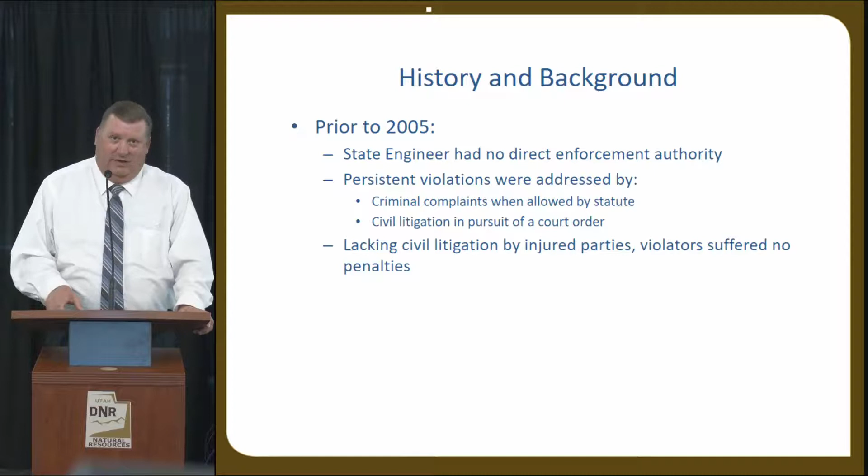In 2005, the statute was enacted, giving the state engineer enforcement powers, and again those powers are administrative in nature. What I do have authority to do is levy a fine. Also in 2005, administrative rules R655-14 were established, which outlines the administrative procedures for enforcement proceedings before the state engineer.

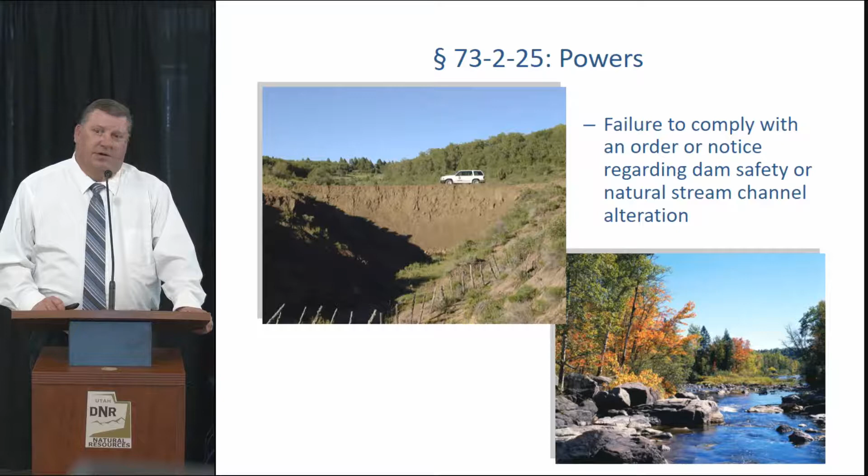Okay, what authority do I have? I can initiate an enforcement action if somebody is taking water without a water right, or if they're violating an existing water right. I can initiate an enforcement action if somebody fails to comply with a statute, order, or notice regarding head gates or measuring devices. I can initiate an enforcement action if somebody fails to comply with an order or notice regarding dam safety or stream alterations.

What I do not have authority for: I cannot go back in time more than 12 months. So if the violation occurred more than a year in the past, I do not have authority to initiate an action. I cannot resolve civil disputes among water users. I cannot resolve internal disputes between irrigation companies or water companies. And I cannot resolve right-of-way, easement, or trespass disputes. You'd be amazed how often I am asked to do one of these things, and I just have to tell them I don't have authority to address that.

Okay, in order to commence an enforcement action, the state engineer must issue what's called an initial order. So an enforcement action does not start when somebody files a referral with me, or when I launch an investigation. An enforcement action starts when I issue an initial order. That initial order describes the violation, makes the violator aware of any penalties he may be subject to, and notifies that individual that each day's violation will be treated as a separate offense.

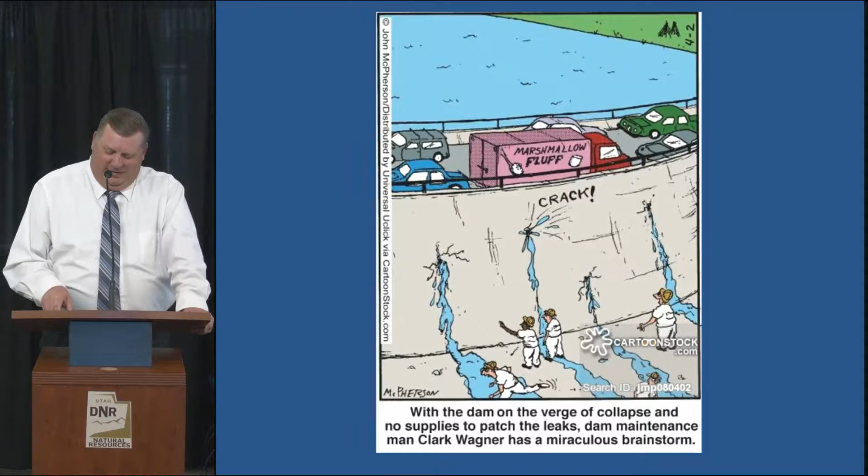So let's talk about the authority that the state engineer has to regulate dams. The state engineer may make rules controlling the construction and operation of dams. These rules include the design, maintenance, repair, removal, and abandonment.

The state engineer may exempt dams that are smaller than 20 acre-feet, and if they were to fail, would not threaten human life, and any larger dam that if it were to fail would not threaten human life and would only cause minimal damage to the owner's property.

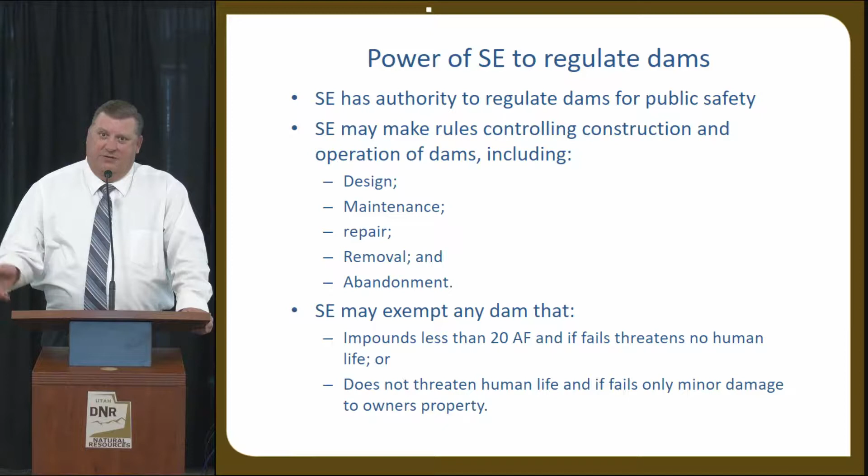Anybody who is working on designing dams must be an engineer licensed in the state of Utah and must have experience designing dams and construction.

Written approval must be obtained from the state engineer prior to commencing work on any dam. Whether it's a large dam or a small one, you need permission from the state engineer. If the dam is more than 20 acre-feet, you need to submit formal plans. If it's less than 20 acre-feet, you still need to file what's called a small dam application, which allows the state engineer to review the water rights for that dam and determine a hazard rating. So no matter what the size, you need approval from the state engineer prior to commencing construction.

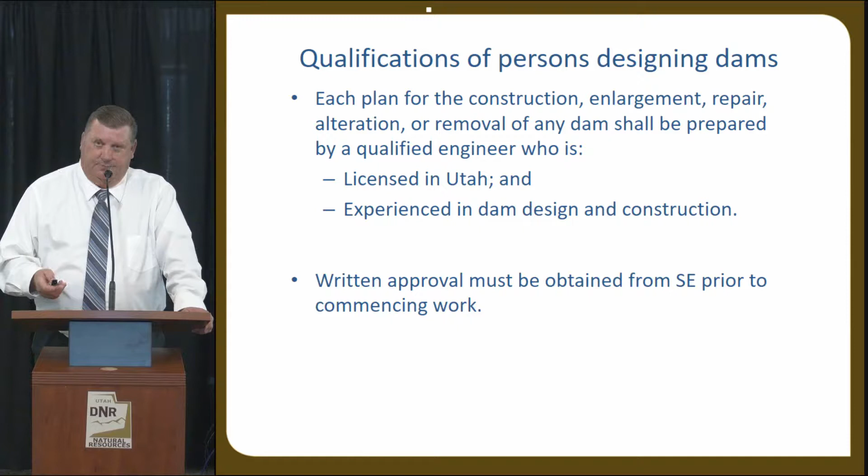Let's talk about inspections. The state engineer has an inspection program where we regularly inspect dams throughout the state. The state engineer may issue orders as a result of these inspections, which may require engineering studies, may require repairs, may set storage limits on that dam, may require them to remove the dam or to breach it, or any other remedy which the state engineer feels necessary.

It is the owner's responsibility to maintain and keep that dam in good repair.

I would just say that you need to take these inspections seriously. There was a dam in the Santa Clara area a few years back where in prior years we had, in our inspection, noticed that rodents were causing damage to the dam, and the owner ignored our report. Lo and behold, I got another call to go inspect the dam that was failing, and when we got there, you could see the water shooting out of the gopher holes in the side of the dam after it had failed. So that was a case that had they maintained and done what we'd asked them to do in our inspections, they probably could have prevented that from happening.

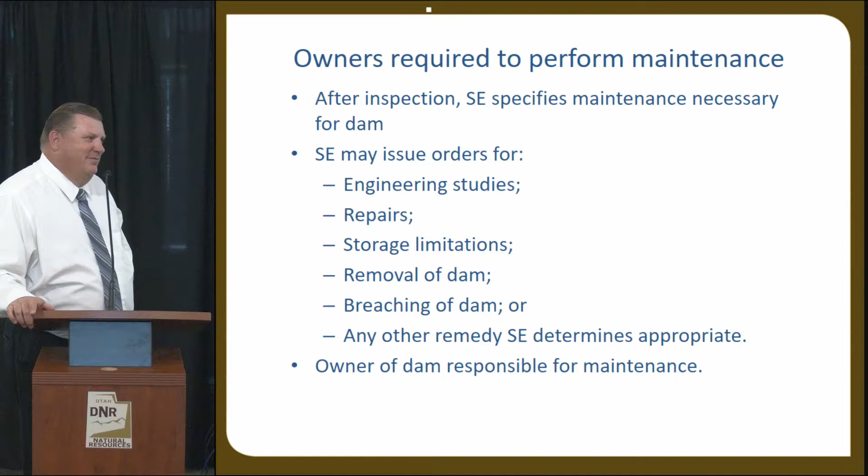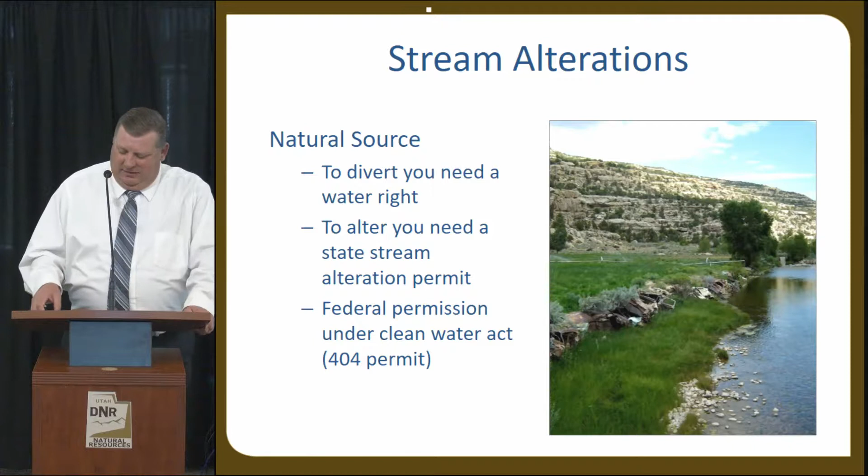Anytime you divert water from a stream, you need a water right. And to initiate that diversion, you have to do some work in the bed and embankment of the stream to install that diversion. Keep in mind, anytime you alter the bed or bank of a stream, you must first have a stream alteration permit, and these permits are approved under the Clean Water Act. So anytime you alter a stream, just know you have to get a stream alteration permit.

For non-commercial applicants, that fee is $100. For a government applicant, that fee is $500. And for a commercial applicant, the fee is $2,000 for a stream alteration permit.

With stream alteration, what would happen if there's been a diversion for decades and a lot of water comes down and washes that diversion out? Can you go back in and restore it, or do you have to go through the process of being approved to put that diversion back in, say it was washed out?

Yes, you can go back and restore it after you've filed your stream alteration permit. How long does that usually take? It's not that long, and it probably is a case-by-case basis depending on what issues they see there.

It's a fairly short time frame to get a stream alteration permit, but there is also a provision for granting emergency stream alterations. Yeah, and thank you for pointing that out, because if there is an emergency and you need to get it done, you can do that work and then go through that process afterwards.

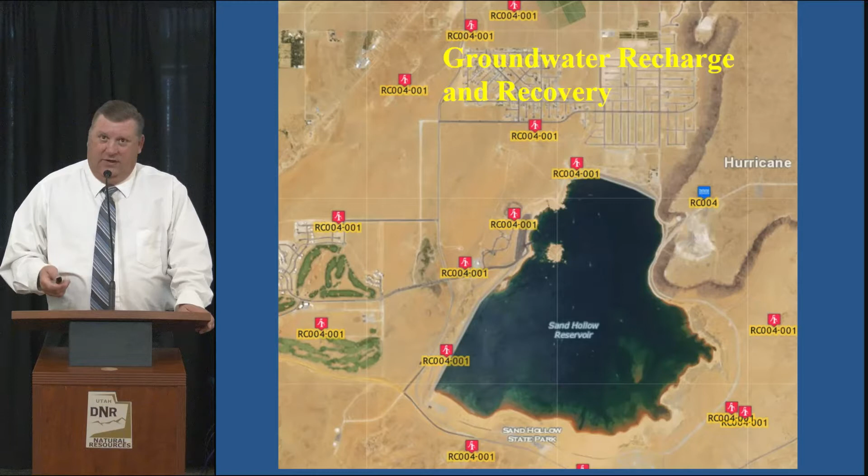So let's talk about groundwater recharge recovery. A person may not artificially recharge an aquifer without first obtaining a recharge permit. Also, a person may not recover water that has been recharged artificially without first obtaining a recovery permit.

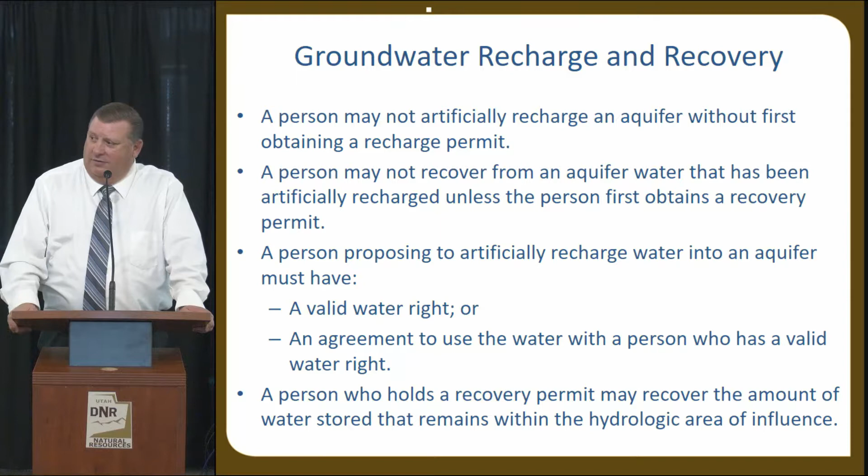Anybody who is proposing to artificially recharge an aquifer must first have a valid water right to do so, or have an agreement with somebody who does have a valid water right. And if you file a recovery permit, you can only recover the amount of water that remains in that hydrologic area of influence. And there are things you have to do to show that.

Let's first talk about the recharge permit. Now, you don't have to file a recovery permit just because you filed a recharge permit. They are two separate things, and we have several cases throughout the state where recharge permits have been filed without recovery permits.

Down in southern Utah, we have several basins that are over appropriated, and several of the government entities in those areas have filed recharge permits and have approval to take excess surface water and recharge it into the aquifer to try and offset that imbalance. So it's not a case of storing water for future use, they're putting water in there to try and alleviate the problems with groundwater declines.

Okay, so on a recharge permit, you need to identify the groundwater basin. You need to have a legal description of the proposed recharge project. You need to know the source and the amount of water that you're going to recharge and have a valid water right for that.

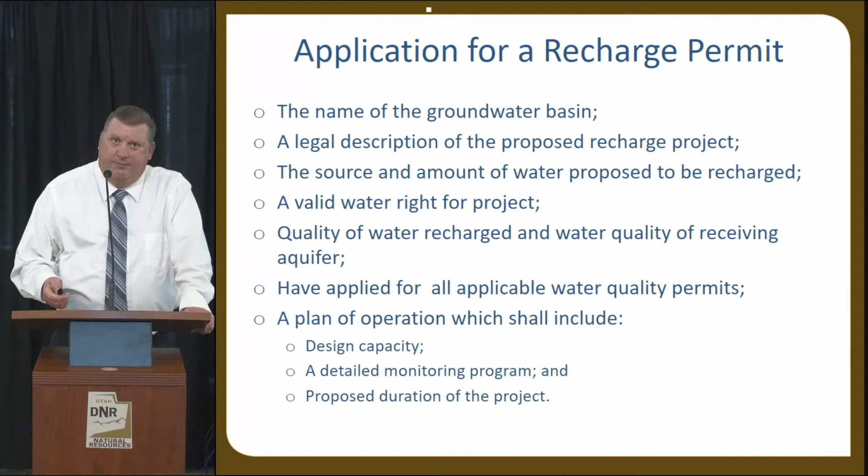Part of this recharge application, you must conduct a study. You need to determine the hydrologic impact the project will have. You must determine if it is, first of all, hydrologically feasible, and that the project will not cause harm to property or impair any existing water rights.

This study must also determine the percentage of water that you're anticipating can be recovered through the project. And you need to show that you have the financial and technical capability to complete the project. There is a filing fee with a recharge permit, and it is based on the amount of water that you will be recharging. It just follows our standard fee schedule for normal change applications or appropriations.

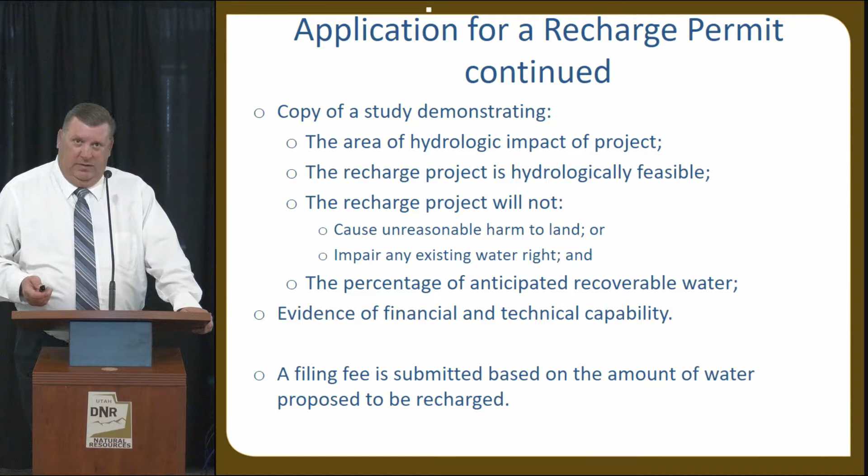Okay, the recovery permit. With the recovery permit, you must identify the legal description of the wells where you will recover the water, identify the source that you will be tapping into to make sure it is actually water that you've recharged, determine the depth and diameter of the wells, and you must identify the land where the water will be used on. There is a filing fee with a recovery permit, and that fee is $2,500, a flat fee of $2,500.

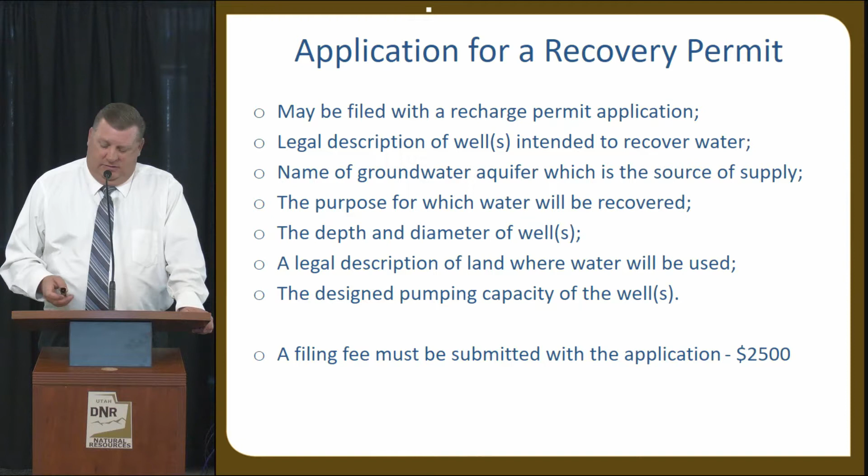Along with a recharge and recovery project, the state engineer will set up a storage account, which you, as the owner of that permit, must monitor the operation of the project and its impacts. You must file reports with the state engineer that will state the quantity of water that has been stored as well as the quantity of water that has been recovered.

And you must show the quality of the water, both of the recharge, the quality of the water of the aquifer, and the quality of the water that is being recovered. There is an annual fee that's assessed that covers the state engineer's cost of operating this storage account.

How do you distinguish between stormwater, like injection sites, like dry wells? Does it actually have to get down to where it enters the aquifer, or is there a line distinguishing between the two? Well, I think first of all, the thing that you are responsible for is the water that you are putting into the system. Right, with your water right.

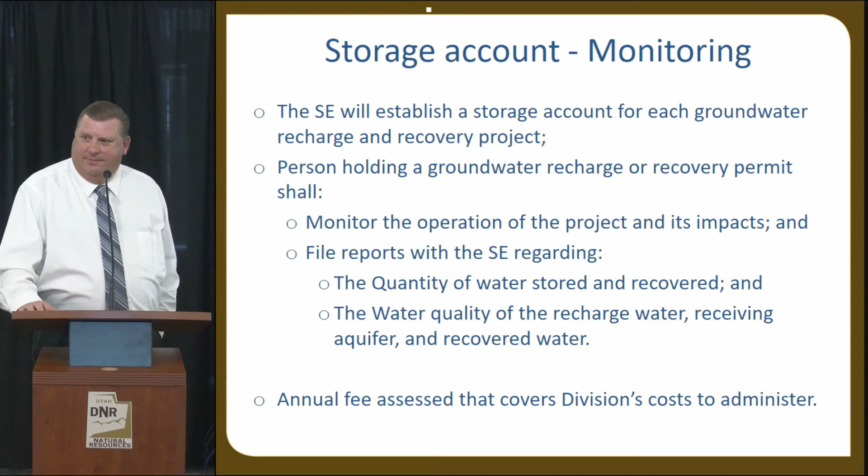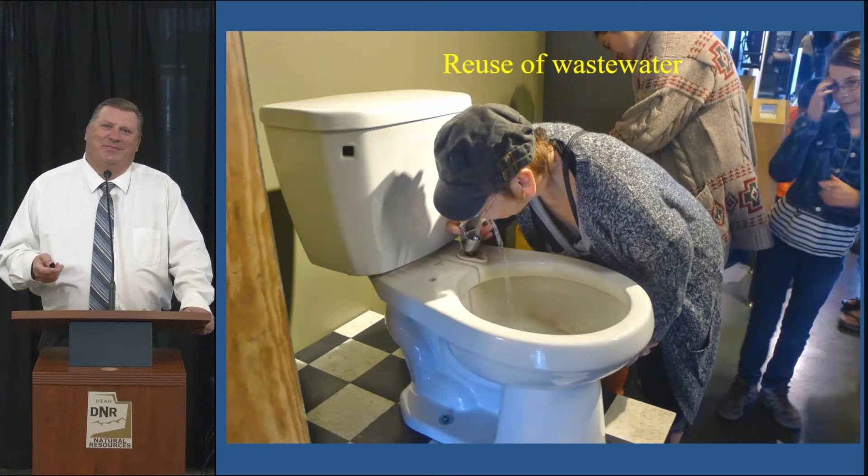Okay, reuse. What we're talking about here are public agencies who own or operate a publicly owned treatment works, a sewage treatment facility. And if you are a public entity that owns and operates one of those treatment works, there is a potential there to apply for reuse of water.

The water right we're dealing with here has to be a municipal water right, and the reuse of water must be consistent with the underlying water right. You can't have any enlargements of the water right by approval of that reuse. The public agency must receive approval from both the Water Quality Board and the state engineer.

If the public entity does not own the water right, they can still do a reuse application if they have a contract with whoever owns the water right, and that water right is administered as a municipal water right, and then all other conditions apply.

With the application process, that application shall include a description of the underlying water right and an evaluation of the water right's diversion, depletion, and return flow requirements. It must estimate the quantity of water that will be reused, and an evaluation of the depletion of the hydrologic system must be conducted.

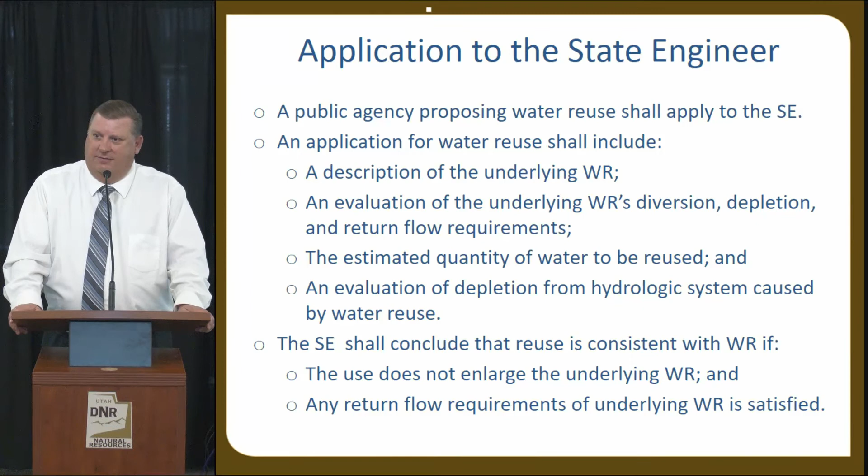Well, that concludes my portion of that. Why is this important? You've just spent two days being bombarded with rules and regulations regarding water. What we need to consider here is water is the limiting resource here in the state. There's only so much to go around, and we need to use that water beneficially. That's why this is important, and that's why we have all these rules and regulations.

Any final questions? Okay, thank you.